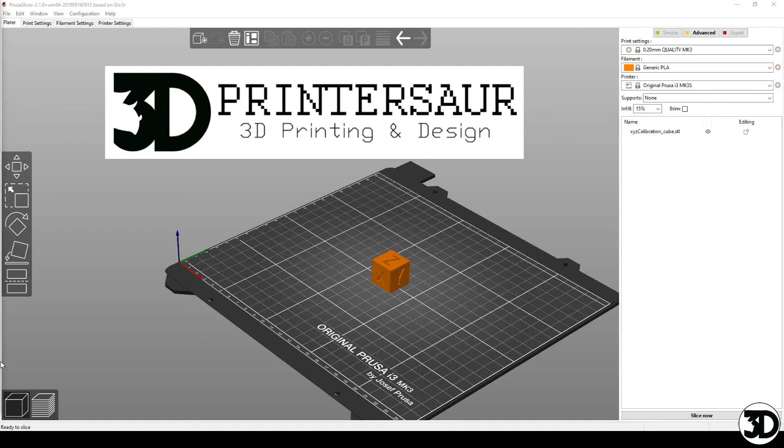In this video we're going to discuss 3 easy materials to print with, and in the next video we're going to talk about some more complex ones. So to start off with, we're going to talk about the easiest material to print with and the most common to find, which is PLA.

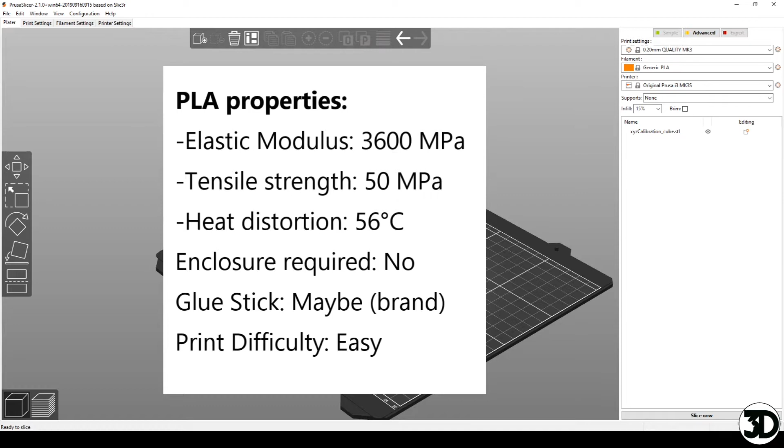It's cheap and it doesn't really need any special things to print with, but that will depend on where you live and on the brand. I've had to use glue stick for a certain brand. It was just a challenge with it, and I do have an enclosure because I live in Canada and I just have too much varying temperatures.

However, it's a great one to print with if you're not worried about mechanical properties, because it doesn't have as good heat resistance and it can break a little easier compared to other materials. Just to compare for slicing reasons, it needs 100 layers of slicing, 1.41 meters of printing, and 39 minutes of print time.

So things to think about when it comes to that is, if you just want stuff that looks cool, PLA is your go-to material. It's going to be easy, run-of-the-mill stuff. However, if you need some better mechanical properties, the next material up would be an ABS.

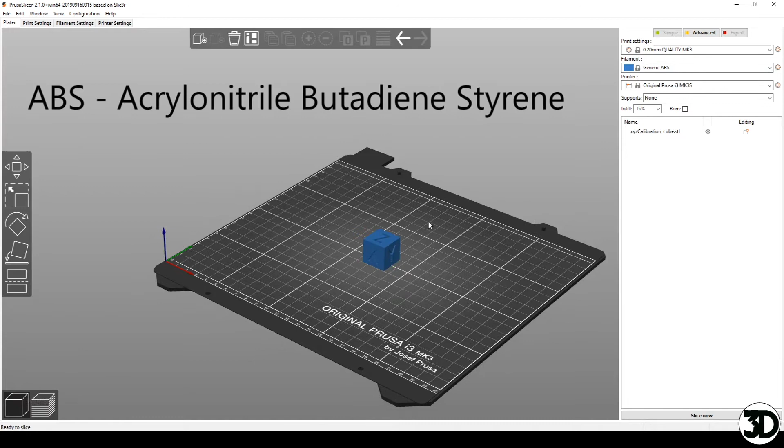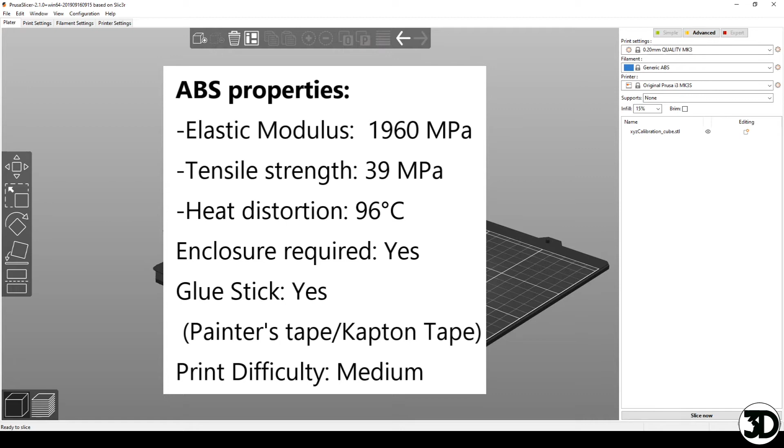So ABS is a plastic that's utilized in cars for the bumpers and all that kind of stuff, and there's 2 reasons for that. It has a great strength compared to PLA. You don't 3D print with cars, but it has a great strength and it has a great temperature resistance, which is a big thing if you need that. So let's say if we're making a cup holder for a car or some sort of emblem or whatever it is, ABS would be a better thing.

The only challenge with ABS is it's harder to print with. You definitely need an enclosure because of the smell, and even just a little bit of wind could potentially make it lift off of your printer bed. So you might even need a glue stick in that regard. But as you can see, it only takes 25 minutes to print compared to the PLA. But again, think about that when you're using this. If you need the properties, definitely use ABS.

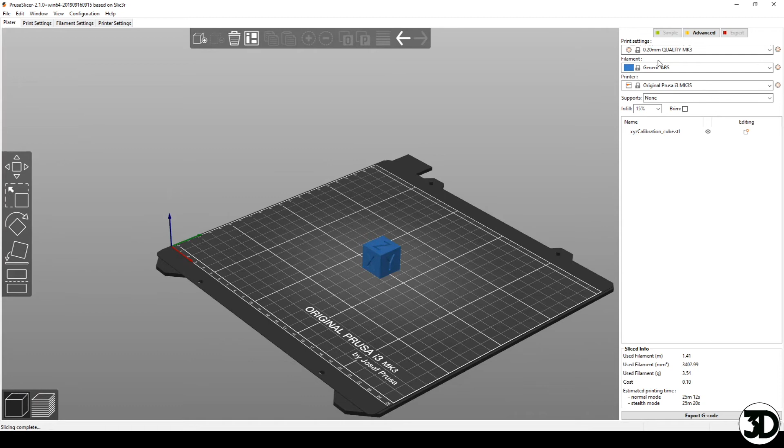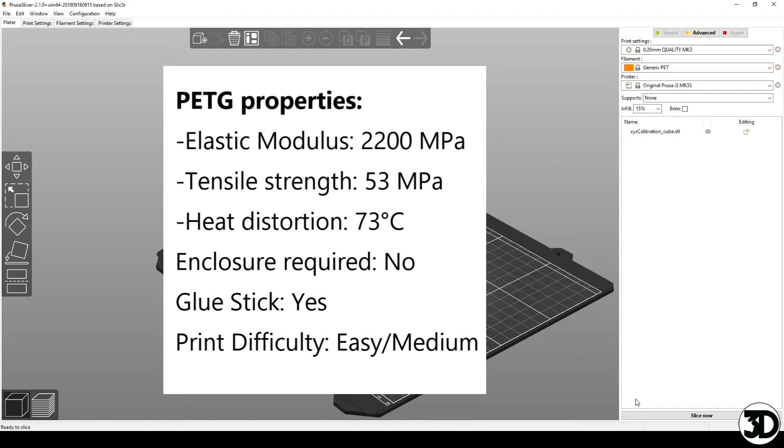However, if you don't need or don't want an enclosure, another material, which is the third one we're going to cover in this video, is PET or PETG. Now, you don't need an enclosure for PETG, but I would recommend using a glue stick if that's the case. One thing you need to really think about is, where are you printing? It could be in a garage, in a house, varying temperatures. Is there going to be a lot of wind or air flow? Because if that's the case, enclosures do help a lot with the reduction of that.

It's easier to print than ABS. However, it does run at a higher temperature compared to PLA, so just be careful when you're touching it. And I would definitely use a glue stick if you feel like it's coming off the print bed too much. So you can see that this one only takes 38 minutes. It's a little less than PLA, but more than ABS. But the properties are really great.

The only other thing you have to really realize is that it strings more than the other 2 materials, so you might have to have a little bit more cleanup time. However, PETG is a little bit more common to get compared to ABS, just with how things are right now. That could change, of course.

So these are 3 materials that are probably the easiest to print with, and I would definitely rank them as PLA, PETG, ABS. However, if you're looking for properties, the next 3 that we're going to talk about in the next video are probably going to be more up your alley. So I hope that helped.